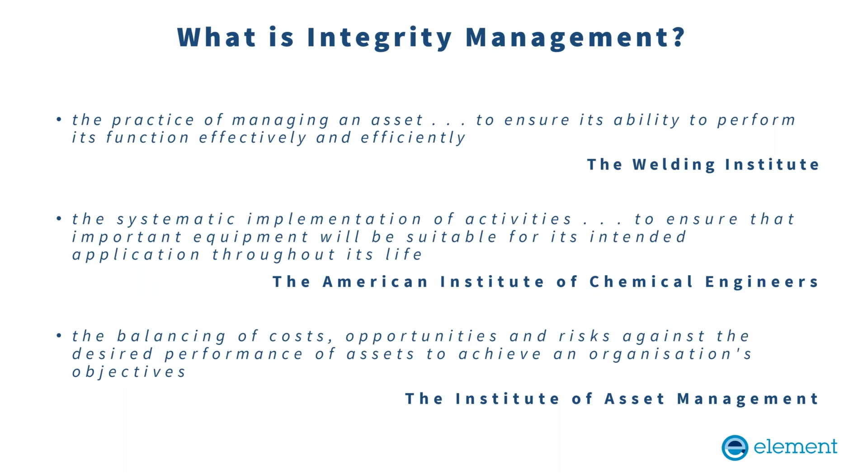In all countries, government regulations mandate that asset owners maintain diligent oversight of their assets to ensure ongoing safe operation. Regular inspections are crucial for assets to identify potential hazards and determine the remnant life of these assets. These assessments provide valuable insight, enabling efficient planning for asset utilization, maintenance, and operation. Effective asset management allows organizations to optimize resources, reduce cost, and minimize downtime.

However, this asset management or asset integrity process can be very expensive and time consuming. So there are opportunities to bring down the cost and time of this assessment, which increases the profitability. It gives us opportunity to innovate solutions, improve the inspection process, analysis process, or do some high-end analysis which gives long-term solutions. For example, one solution is real-time collection of data and analysis, which provides actionable insight into how to improve the performance of the asset in real time.

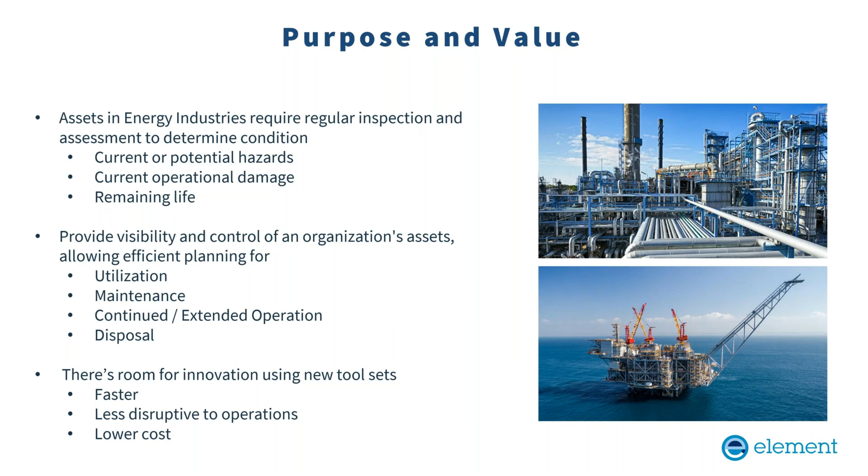We will now delve into the asset management process through a case study, which will focus on corrosion under pipe support, providing a practical understanding of effective asset management in action. During a routine site inspection, corrosion under pipe support was identified beneath a pipe support. A site investigation was done, pinpointing the location and extent of corrosion.

Our Singapore team then conducted a site visit, performed non-destructive testing to assess the condition of the affected area. Samples were also extracted from the critical location with due permission from the asset owner and sent to our lab for analysis to determine the root cause of the failure and the mechanism of corrosion of this asset.

Results from both on-site and in-laboratory testing were utilized as input data for the digital engineering team in UK, who did the modeling and simulation to predict the remnant life of the asset. This provided our client a comprehensive assessment of this asset's integrity.

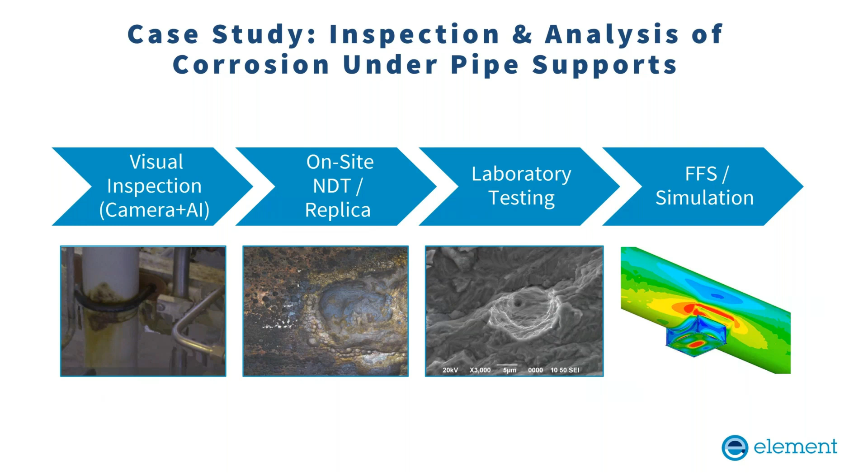So we start with part one of the process, which is inspection, detection, and classification. The initial phase involved conducting a thorough inspection accompanied by photographic documentation. The collected data was meticulously analyzed to pinpoint the most critical areas requiring further investigation.

It shall be noted that Element has established a partnership with one of the partners who are specialized in advanced data capture technology. They utilize laser cameras to rapidly collect the data, which was then processed using artificial intelligence technology. This innovative approach enables us to quickly analyze the data with high accuracy, which provided a wealth of insight within an extraordinary short period of time.

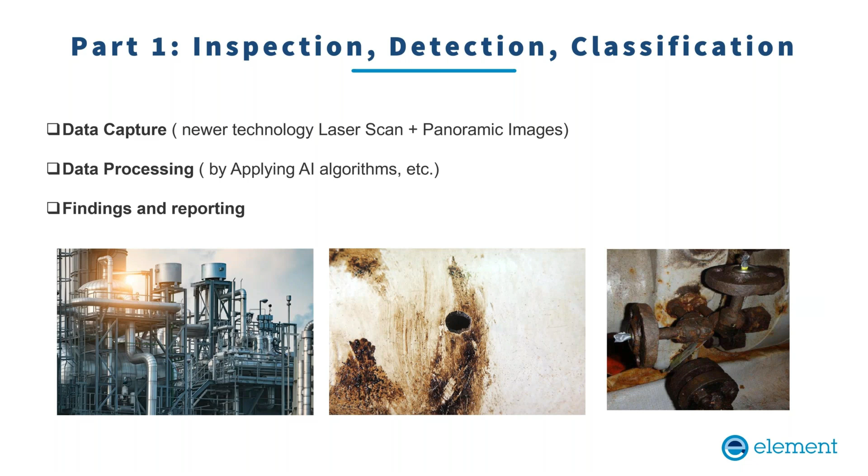After identifying this location, it was our responsibility to confirm the severity of the corrosion or damage, and it was also necessary to determine the mechanism of damage. This slide will elaborate on the damage mechanism and investigation through the following analysis step.

Our investigation started with visual examination by our NDT team, followed by non-destructive testing according to our standard procedure. Subsequent to the NDT and visual examination, we did on-site metallographic examination, and then decided to take samples from critical areas of the asset for further analysis and lab-based testing. After analysis and testing, we provided a comprehensive report to the client which summarizes the findings and determines the condition of the asset and type of damage.

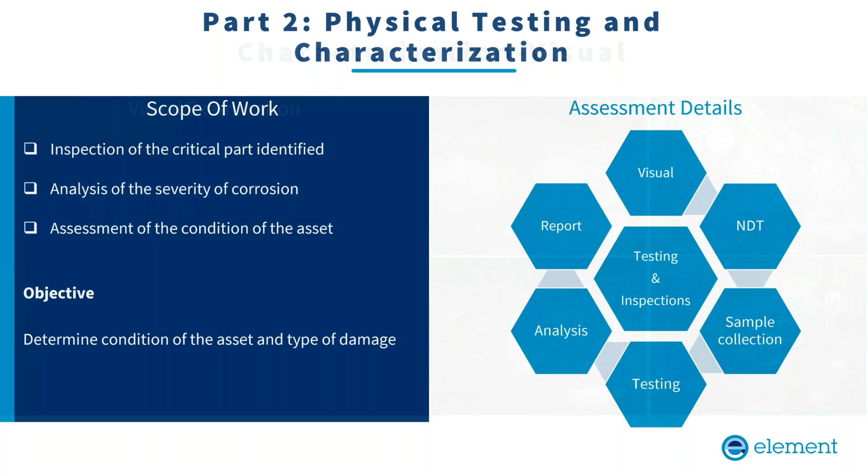Visual examination indicated the corrosion was primarily at the surface level with no sign of extensive internal damage. However, further analysis was required to confirm the preliminary assessment. Presence of corroded surface under insulation suggested that seawater may have contributed to this corrosion. Inspection findings highlighted the importance of adequate protective measures such as coating or cathodic protection in a marine environment.

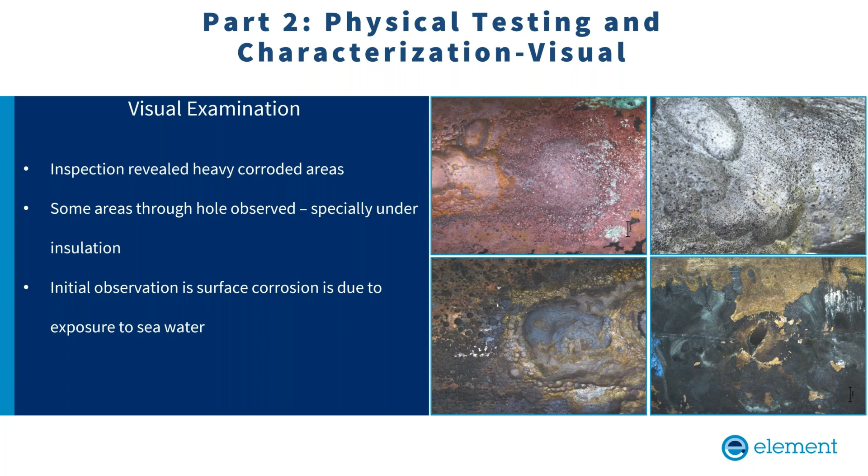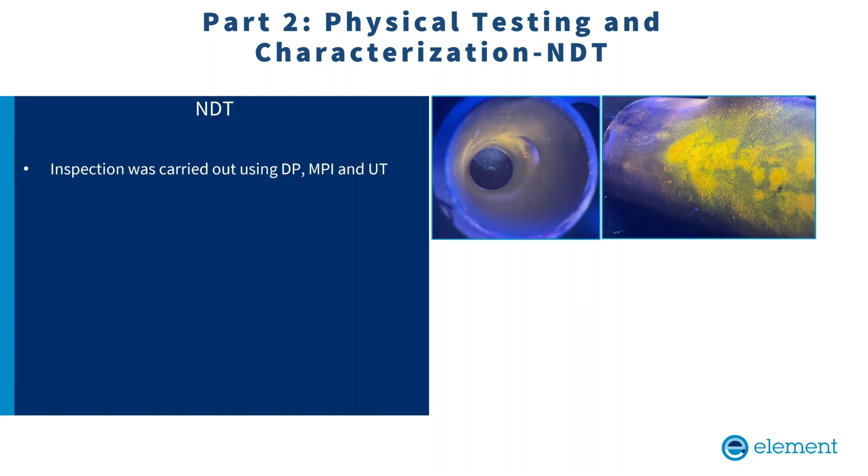Further investigation was carried out to understand the severity of the corrosion. A thorough NDT examination was carried out using MPI, dye penetrant, and ultrasonic testing. Some areas, we have seen through-holes, as I mentioned previously.

We have done fluorescent magnetic inspection, which shows severe presence of corrosion at the surface. We also have seen, during UT, through-thickness cracks inside the material. So initial NDT investigation suggested that surface corrosion is primarily the main corrosion problem of this asset, and also that there was some through-thickness crack present in some locations.

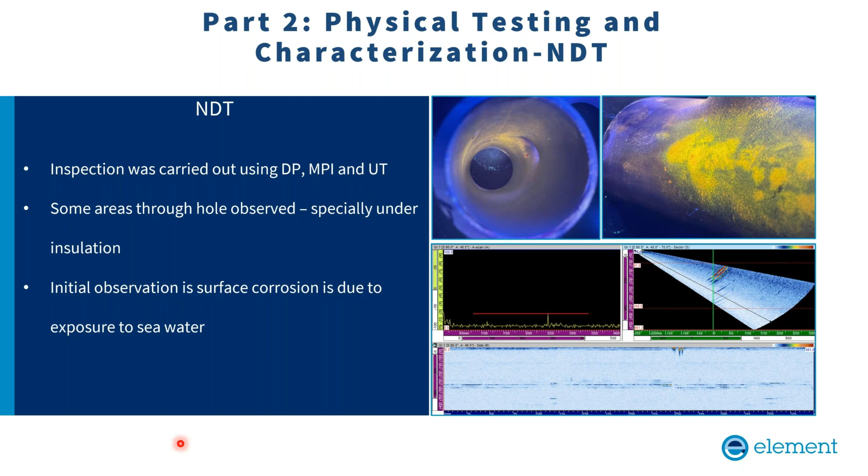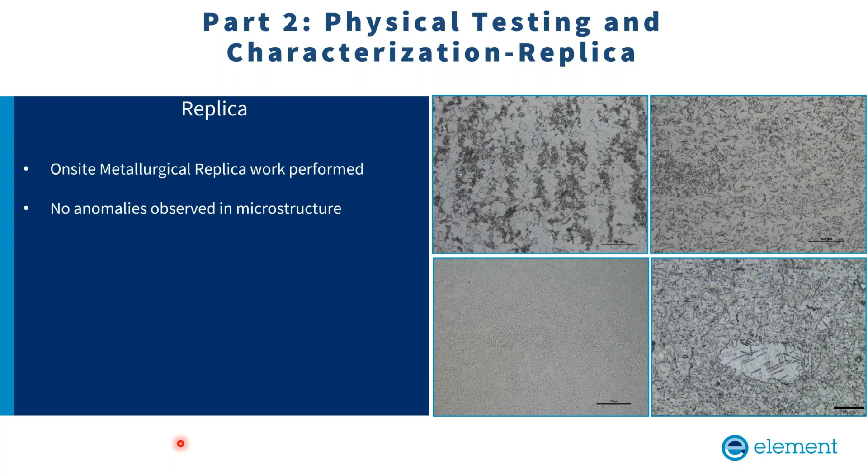To assess the condition of the asset, we have also done replica analysis in several locations of the pipe. We mostly found the structure is as per the expected microstructure of the material. However, occasionally large grain size was found in some locations, as shown in the bottom right of the picture.

However, these grains didn't contribute to any failure of the structure, and these were only occasionally found in one or two locations. A complete hardness test was done. On-site hardness test was conducted, and it appears that the hardness value was as per the relevant standard, which further confirmed the integrity of the material.

So in summary, on-site replica and hardness tests suggested that the material of this asset is in good condition. There was no sign of significant deterioration or degradation of the material during the operational life of the asset.

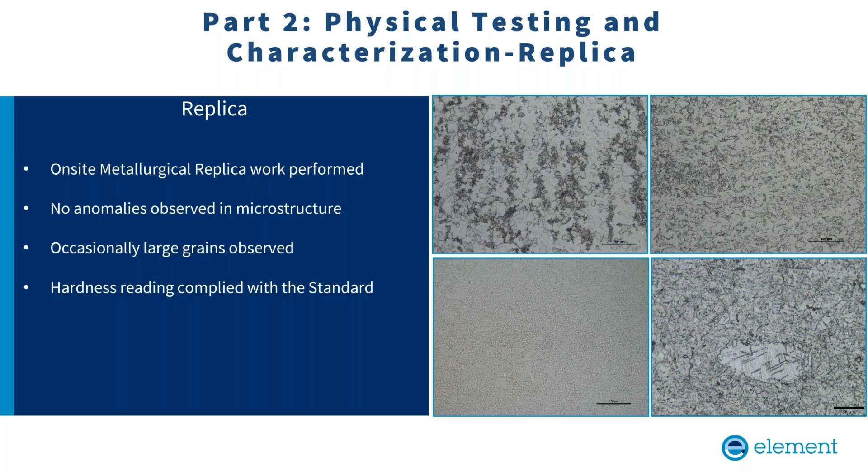After doing this on-site testing, monitoring the health of the material, it was also necessary to understand the forces acting on this asset during operation, because this data was not present with the customer. However, this data was very important for further remnant life assessment.

So after doing replica and metallographic work, strain gauges were installed at different critical locations of the component, and strain versus number of cycles was collected over a period of one month. This particular data was very useful, giving us dynamic stresses imparted on the structure during operation. This data was fed to our digital engineering team, who used it as a crucial input for their remnant life assessment.

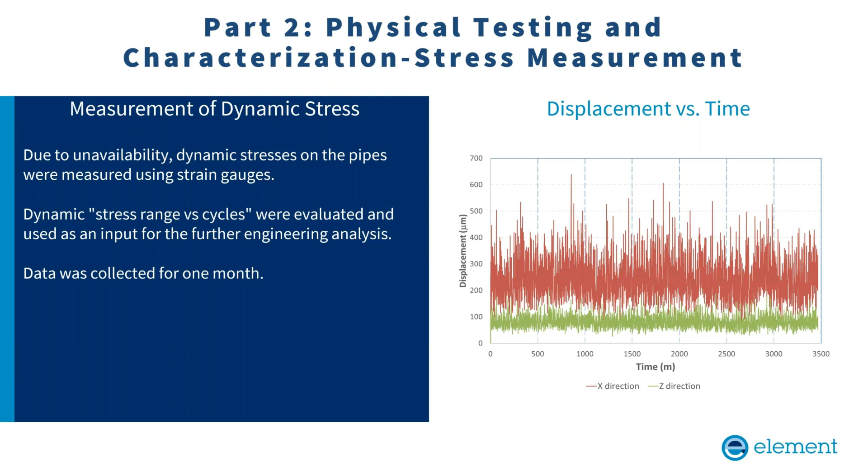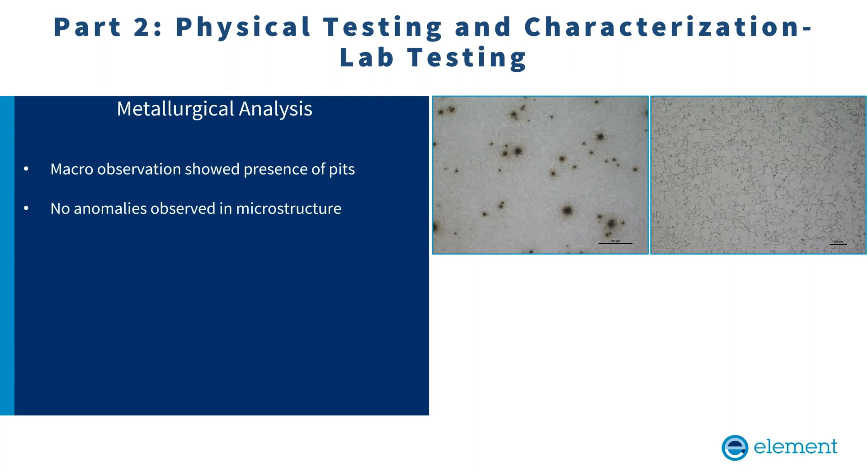As I mentioned before, we have taken some samples, with due permission from the asset owner, for further analysis in our laboratory. We have done an extensive in-lab microstructural analysis. There were no anomalies found in the microstructure. However, pits were observed in the microstructure, and this was observed during SEM observation as well.

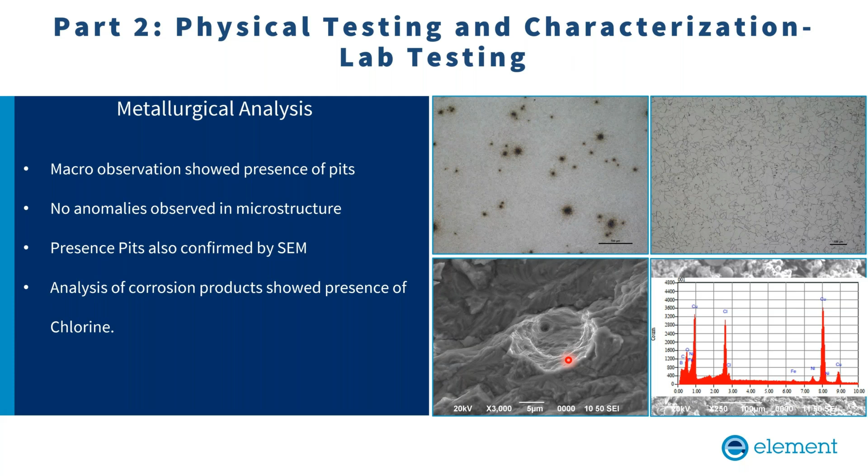Analysis of the corrosion product was done, and it was observed that chlorine was present in these impurities. This confirms that the corrosion is related to exposure to chlorine, which caused localized pitting of the material, and this is the main cause of the corrosion failure mechanism in this material. We have done further analysis of the component where through-thickness cracks were observed during UT measurement.

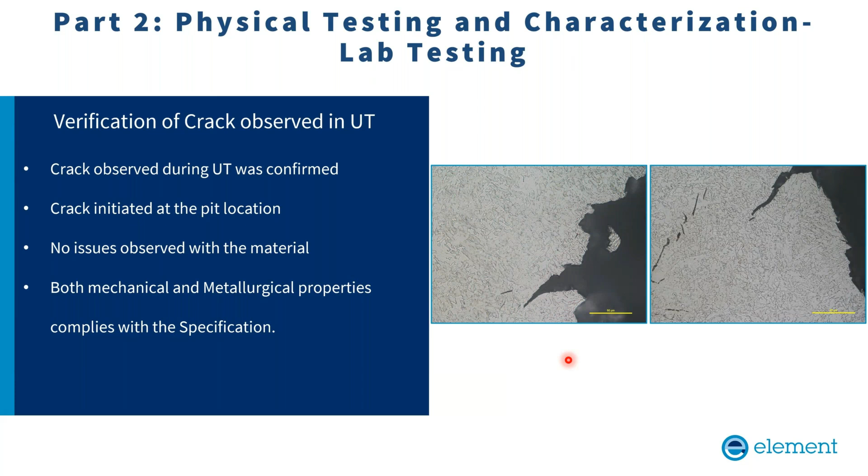Detailed analysis was done, and it was observed that this particular crack actually initiated from a pit location, and due to applied stress, this has propagated through the material. However, there were no issues observed with the material, and as mentioned before, both mechanical and metallurgy properties comply with the specification of the standard.

So in conclusion, for part 2 of the analysis, we can say that pits observed on the pipe surface, a macroscopic examination at the lab confirmed the presence of pitting, and there was also observation of chlorine on the surface in the lab-based observation, which confirmed our speculation. We also did microscopic examination and saw that there is a through-thickness crack which originated due to pitting.

This data for mechanical test and metallurgical analysis was supplied to our digital engineering team, who used this data for further remnant life assessment using finite element assessment.

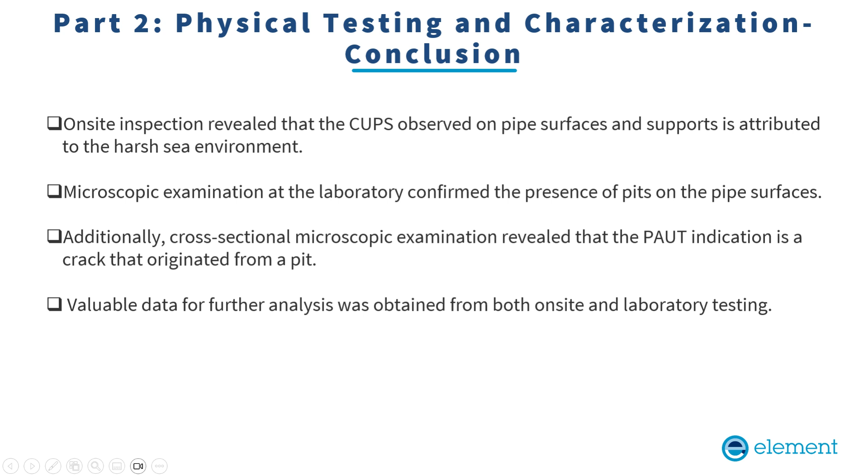This brings us to part 3 of this analysis, which is fit for service analysis. The data from material testing, collected during on-site and in-lab analysis, was used for further finite element analysis to do in-service remnant life assessment.

The fit for service assessment, or remnant life assessment, was performed as per the industry standard. We used advanced finite element software to facilitate this analysis, and detailed modeling and simulation was done to simulate the accurate operation condition and the corrosion condition of the pipe.

By leveraging our capability to do on-site testing and finite element analysis for fit for purpose analysis, our client got enough information to make decisions about maintenance, repair, and replacement of the critical asset.

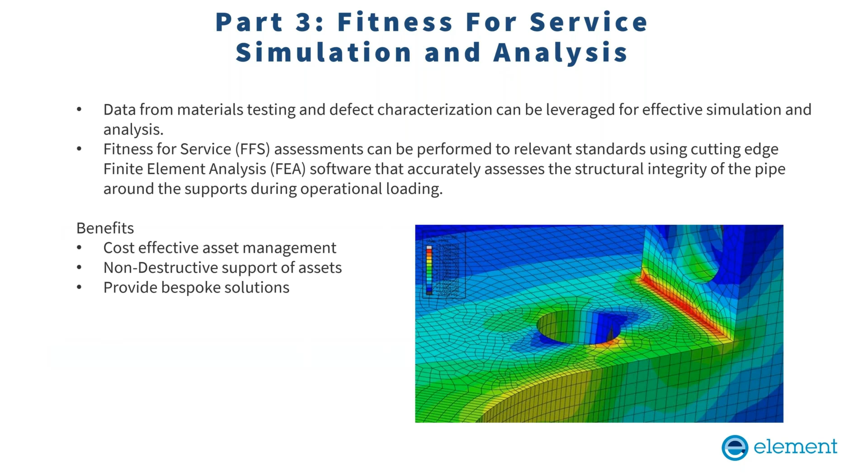We will now discuss very briefly how the simulation and analysis was done. The typical material data, material loss data, geometry, material property, and the on-site loading data were used as input data for the analysis.

The condition of the corrosion, the material loss, and the depth of the pitting were all used as input data for this analysis. Dynamic loading condition was simulated in the structure to perform this analysis. The data for operation condition, worst case operation condition, were also obtained from the client, which acted as input data for the analysis.

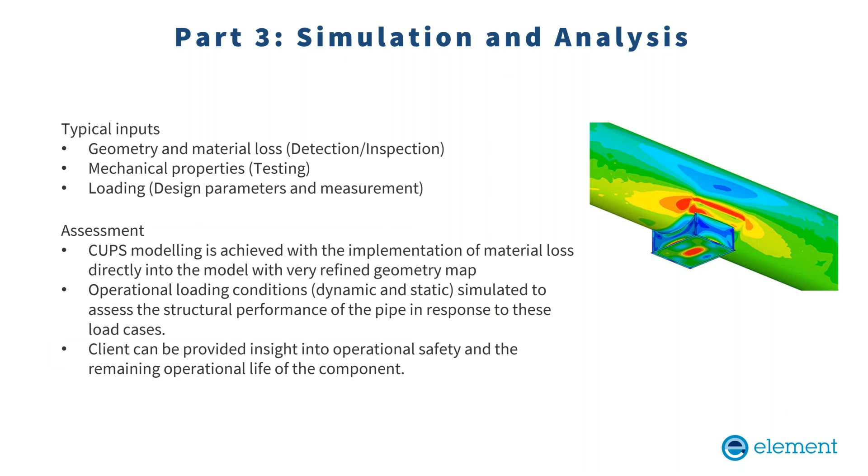The advanced API 579 part 1, level 3 type of analysis was conducted, which is recommended by this standard for such situations. This type of analysis allows us to simulate the actual condition of the pipe with multiple damage, and through this analysis we were able to find out the impact of this crack present in the material, and what will be the impact on the remnant life of this pipe, of these structures.

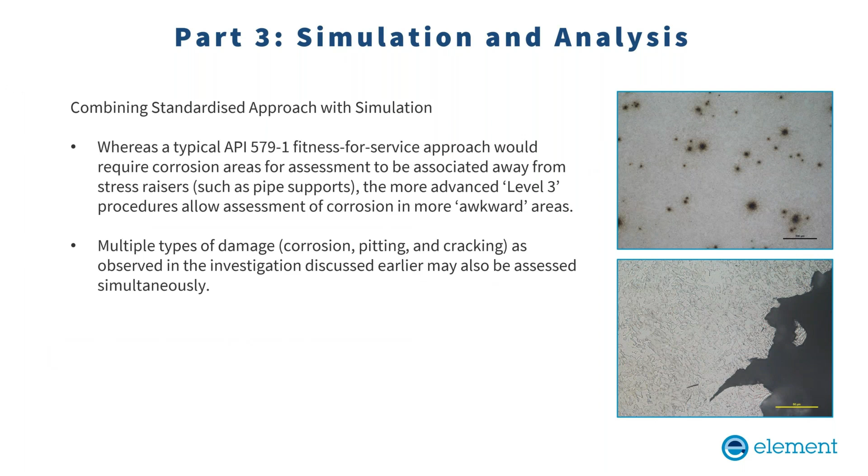We then put this data into a risk matrix and did an analysis to find out the start of life and end of life crack dimensions.

Our detailed analysis showed that some of the cracks or pits present at the start of life will be very near to the critical zone of the material at the end of life, and there will be some which will still be in the safe zone.

This helped our customer decide which areas to look at first, and what protective or preventive action our client may take for this type of analysis and structures. So a decision can be made using a risk-based approach, and this helped our customer a lot for future maintenance and inspection.

To summarize, this case study provided an innovative approach, which through high-end inspection, testing, and high-end analysis, helped our customer reduce the cost of maintenance. It helped them understand which areas to look at first, which areas are critical, and this helped enhance the quality of the structure and reduce risks, all through a one-stop solution through our services at Element.

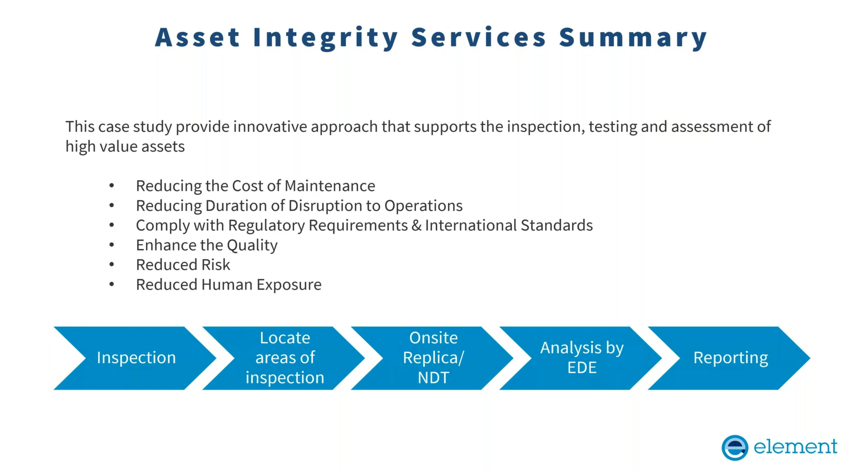At the end, I'd like to highlight that the code and standards used for this type of assessment are already well established in the industry. There's nothing we are inventing. These are all well established, and they give guidelines on how to do risk assessment or fit for purpose analysis for different structures, pipes, or offshore and onshore equipment.

This is where I'd like to end my presentation, and if you have any questions, we can answer them.